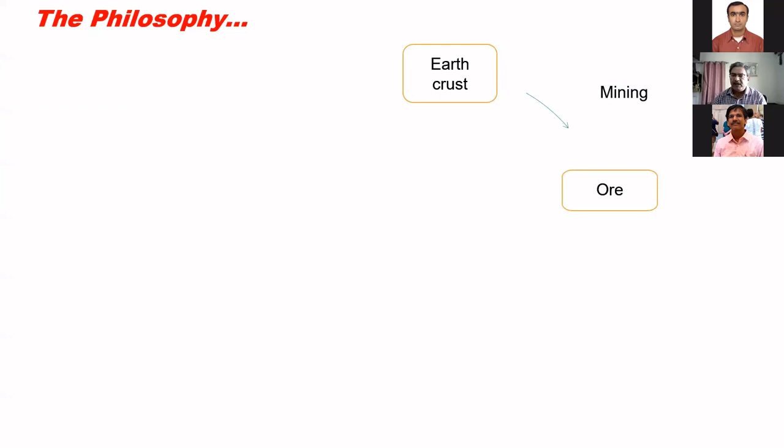Now, moving on to the philosophy. The philosophy is very simple. Earth crust is being exploited in the form of mining activities. We dig out ores, we take them to the processing units, mineral is extracted, everybody is happy, industries are making money, nobody bothers about what is going to happen further on.

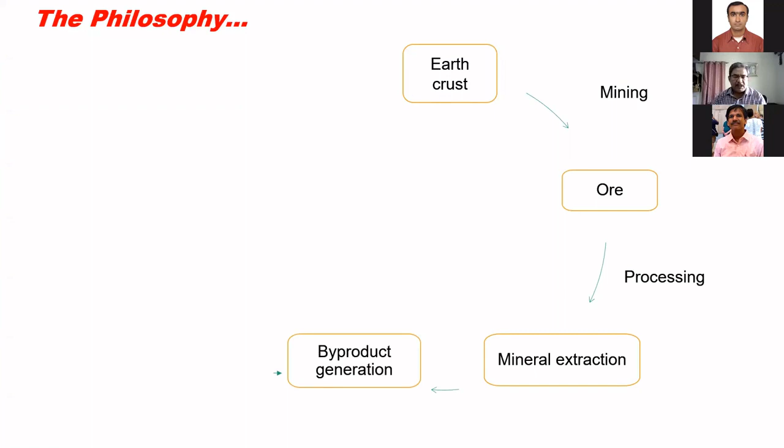This is where the byproducts are generated, and these byproducts are transported to different locations. We call them dumping yards, stacks. These could be lagoons where we are storing them, or disposal ponds, and so on. People have started realizing that handling, disposal, and storage of all these types of industrial byproducts is becoming a major task, a major problem. So there's a big question mark where a lot of environmental geotechnology related issues have to be discussed, and I'm sure previous speakers have already talked about this.

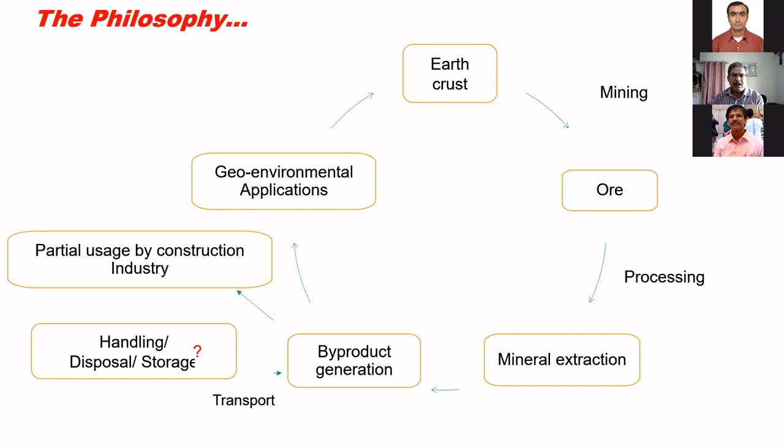Partial uses by the construction industry has already been demonstrated, and it has been very successful. Unfortunately, geo-environmental applications have not been done much with this waste, and the sustainable development part was also missing.

The major thing which is in my mind is how to utilize these industrial byproducts in bulk. India produces hundreds of millions of tons of each of these wastes per year. The question is, unless we clean this up, industries cannot go ahead with their task. Industry ultimately wants to generate the product, not the byproduct. And even if byproducts are being generated, the better picture would be to utilize them so that we can create more space for tomorrow's dumping. So the theme is how to utilize all these industrial byproducts in bulk, millions of tons at a time.

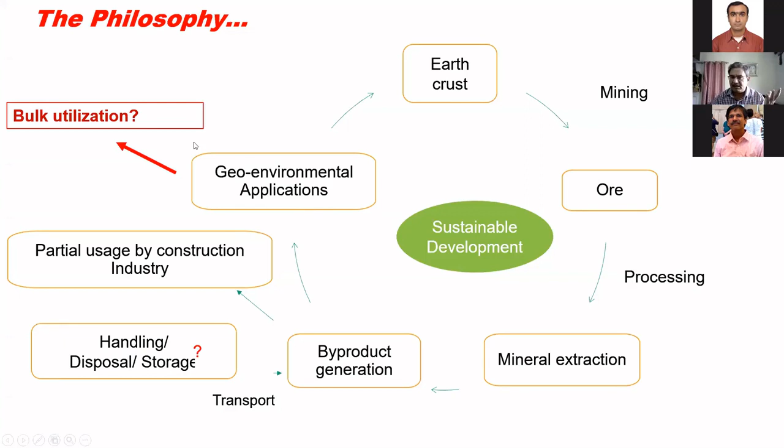The potential industrial byproducts which I have selected are the bauxite residues. It so happened that most of my funding agencies or sponsors happen to be the guys who are dealing with red mud in the country.

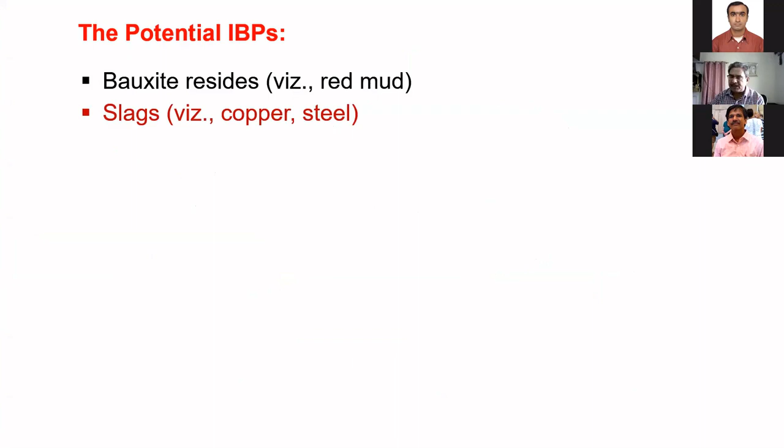The slags, copper and steel both. Ash from combustion, different types of ashes which are coming out of the combustion. Biomine waste - Krishna Reddy has done a lot of work in this area.

And the issue is that when we talk about municipal solid waste, there are big mountains of landfills which have been created in the middle of the cities. People are clueless what to do with this. And this is where my idea is that biomining should be done to clean up the land, and we can utilize it for a better purpose.

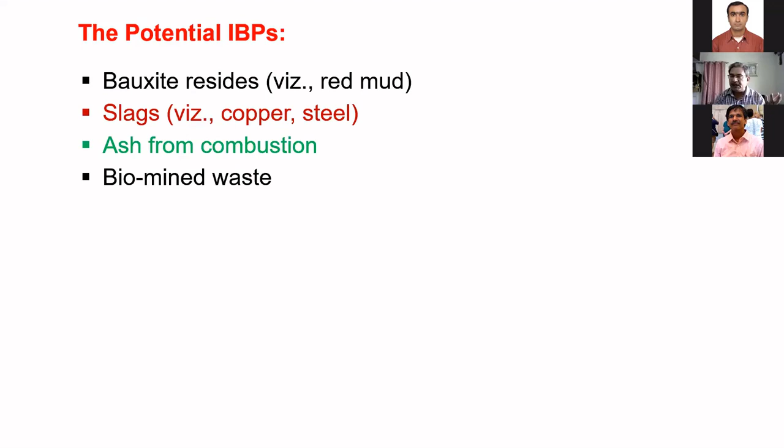But the questions are several. Once you start biomining, where and how you are going to dispose of the materials which are coming out of the biomining process - that's a big challenge. And of course, the mine tailings and overburden from mining is also a part of this mission.

And that is where I said it so happens that the theme of this short-term course happens to be a subset of the mission IBPs.

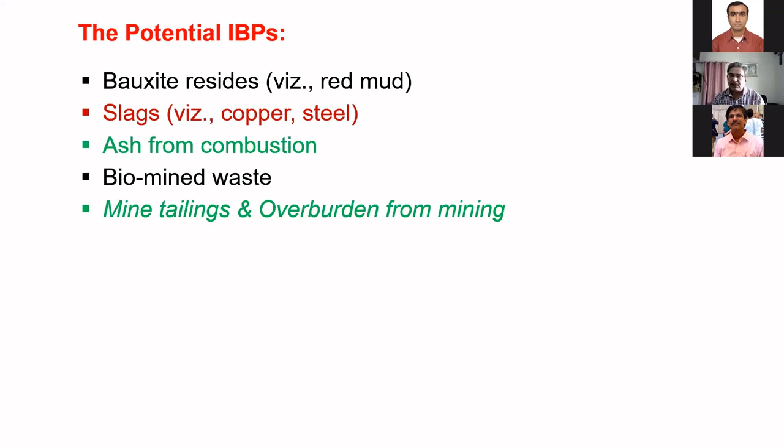These are the priority areas, apart from which I am also dealing with construction and demolition waste, dredge sediments, because I'm located in a city like Bombay, where several ports are there, private and government operated. The biggest challenge is what to do with the dredge sediments - where to store them, how to reuse them, how to do engineering out of them, and so on.

And of course, coal washery residues. I was lucky enough to be a part of a big project in central India, where we utilized the coal washery residues for creating a railway embankment and the sidings.

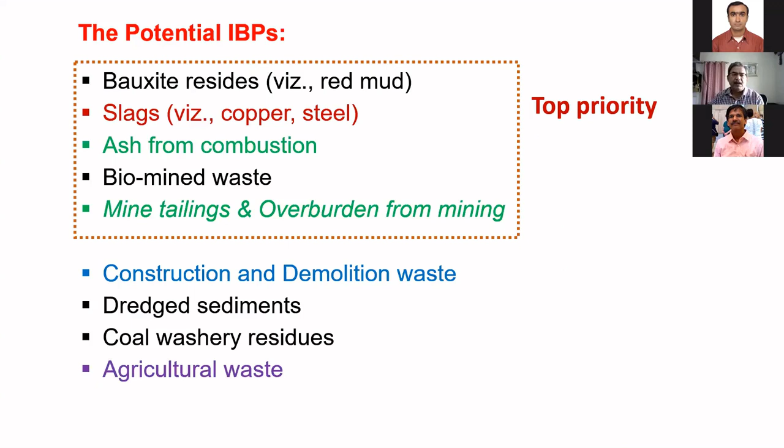We are also talking about agricultural waste, which is very contemporary in the context of India being an agrarian society. So bio-mined waste and agricultural waste is also part of the mission IBPs. Out of so many modules, which I call them, the first 5 are the top priority because the volumes are really tremendous, and industry is very happy to collaborate with academia to sort out this issue.

The motivation comes from the fact that industrial establishments in India and all over the world contribute to the growth of economy through good output, something like the main product. Look at a thermal power plant - they produce electricity, good output. But at the same time, they struggle to deal with the bad output - fly ash. Similarly, steel manufacturing industries produce steel, very fine, but the bad output is slag. These coupled phenomena are happening everywhere, and this is the genesis of the motivation for taking up this project.

I wish that IBPs should become part of the mission Waste to Wealth and Welfare - I call this WWW - through recovery, recycling, and reuse. In fact, I've suggested to the Government of India to create a different ministry known as WWW, Waste to Wealth and Welfare. Welfare is becoming very important, and I'll show how this philosophy can be linked with welfare of society and individuals. That is the mission IBPs - achieving this through recovery, recycling, and reuse into a well-defined policy.

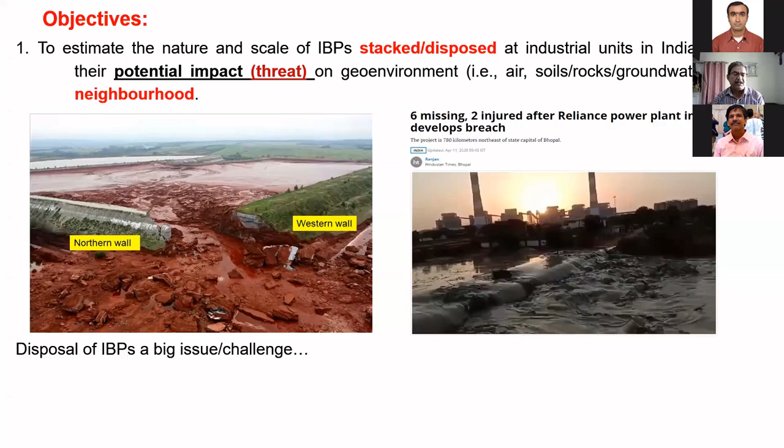In my own country in India, this happened a few months back - there was a breach of the dike from the ash pond. So these pictures challenge us: what should be our role in nation building? Disposal of industrial byproducts is becoming a big issue and challenge.

Everybody is realizing that their disposal facilities have lived their life. They are aged and have already exhausted their capacity for taking fresh industrial byproducts, and they are prone to failures. Audits have never been done regarding the stability of these systems, their age, or how the weathering process might have changed the properties of the geomaterials used to create them maybe 60 or 70 years back.

There is no availability of land. You talk to industries, the biggest question is they can't expand the disposal facilities - like in cities, you can't expand the MSW disposal facilities, landfills. It's becoming a very hapless situation, and whether operations should be continued or permanently closed is being thought of. Industries are thinking about whether to continue operations or close them completely. Now, closing operations is not going to be a solution for developing nations particularly.

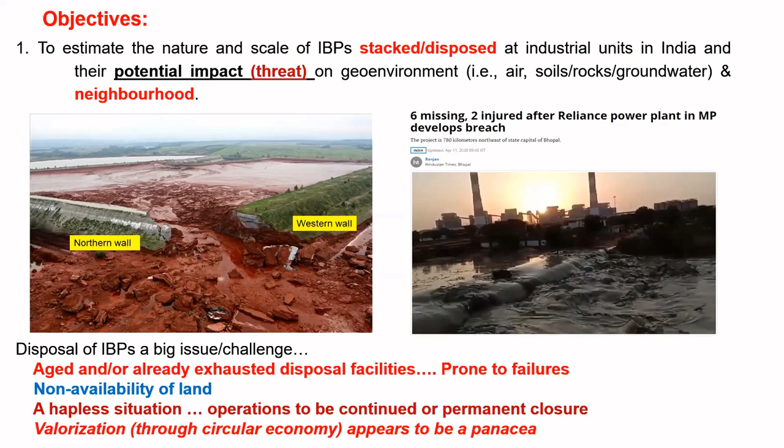So this is where the valorization concept fits in extremely well, clubbing it with circular economy. I was talking about the WWW mission - so where is the welfare? The welfare comes from the circular economy attached to the valorization of industrial byproducts, which is mostly an industrial process adopted by geotechnical engineers, civil engineers, technologists, followed by creating a circular economy out of it. Once this is done, this will be a very win-win situation for everybody.

The second thing is we would like to assess the status of existing scientifically proven innovative emerging technologies for valorization of industrial byproducts. This is where I said I want to audit who has been successful in valorizing the industrial byproducts, both at field level and laboratory level. So these are success stories. Out of these success stories, apart from writing papers, how many codes have been developed?

Because this is what the administrators ask you - the agencies who are going to implement it ask you, is there any codal provision for utilizing this material? And we got a very sorry figure over there, because research has not really percolated into creation of codes, the code of practices, and policies.

So valorization of IBPs for different applications, sustainable ecological infrastructure development - this is the main theme, being a civil engineer and a geotechnical engineer. We want to do this.

Monitoring the impact of industrial byproducts on the ecosystem, both in their native and recreated state. Suppose if you utilize this industrial byproduct and create something somewhere, how it is going to impact the geo-environment, both in the form of the stacks which are present over there, and how these recreated systems would contribute to contamination.

Creating policy guidelines to identify industrial byproducts as a man-made resource. I'm sure my idea is that all these industrial byproducts can be converted into man-made resources, either through in situ or ex situ neutralization, or man-made soils. Some of my research scholars are working on this concept of converting IBPs into man-made soils, and there has been some success. I will share some results with you.

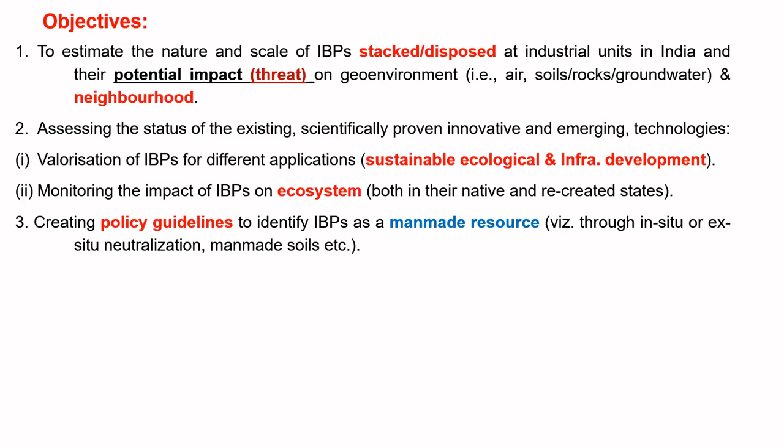The biggest issue is transportation of the industrial byproducts. If I want to transport industrial byproducts, there are no policies. People say it's a hazardous toxic waste, you can't even touch it, you can't even transport it, you can't even courier it for testing the samples. These type of regulations exist, unfortunately. So creating policies for transportation of IBPs in bulk from the place of disposal stack to the place of utilization - if this happens, 90% of the task is done, because I know the technology is there and we can use the material without any problem.

And of course, I wish to create a task force in the mission mode for industrial byproducts, and formulation of relevant codes, manuals, standards, and guidelines.

Another challenge would be transition from policy to practice, which is very challenging, and exploring the possibility related to the circular economy revolving around industrial byproducts, particularly after the COVID-19 situation.

Background work - several meetings have been done. I'm sure Sharath was also a part of this, and some of the audience were also part of these activities. All these are available on the website. When you visit my Mission IBP's link on my webpage, you can find everything over there.

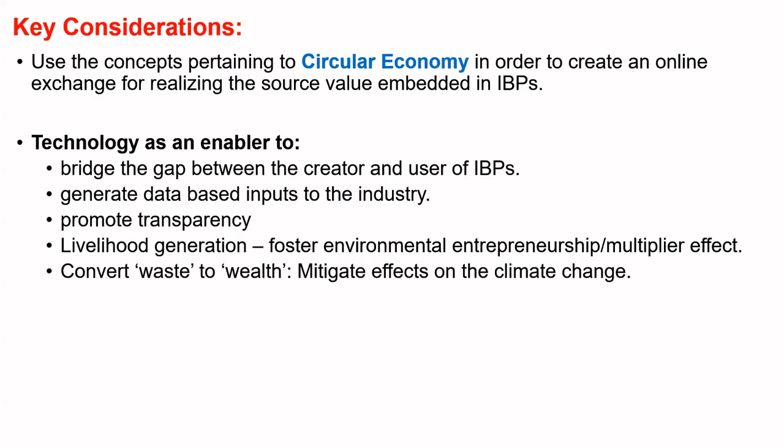We want to generate a database for industry as an input, promote transparency in the whole process. We want to create livelihood generation of environmental entrepreneurship multiplier effects, I call them, and convert waste to wealth and mitigate effects of climate change.

This is also getting linked with CSR, corporate social responsibility. Now this is known as scientific social responsibility, of which I was a part - I was a member of that committee of the Government of India. So there's something known as scientific social responsibility, which is now looking at these type of activities.

I'm sure people who are interested in becoming entrepreneurs - I call them environmental entrepreneurs - because they are dealing with these type of thoughts and ideas, can become a part of this. And collaboration between academia and industry for contributing towards more sustainable development initiatives.

What is the way forward? The way forward is that data from individuals, researchers, industry is very, very crucial. Please share this data with us in the form of research which you have conducted so far, technology demonstration which you have done so far. This is what is going to help in creating future strategies.

This data analysis is going to provide direction regarding possible usages and identification of matchmaking of industrial byproducts - what should be added to one IBP to create a value-added material. This is what I call the matchmaking of IBPs. Sometimes I also call this the horoscope reading. Some of you who understand, there's a big science behind matching the horoscopes of the bride and groom before they get married. So it's something of that sort which the thought process is based on.

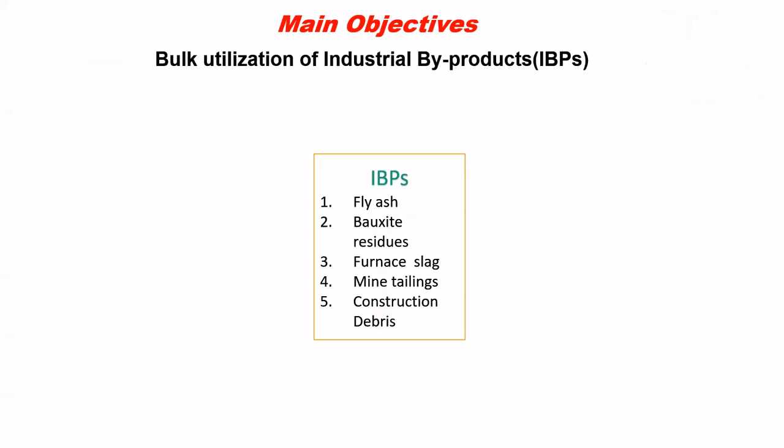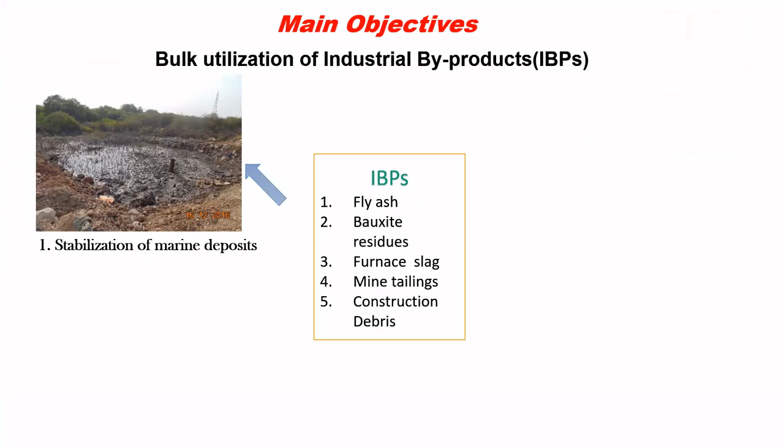We have used fly ash, bauxite residues, furnace slags, mine tailings, construction debris for stabilization of marine deposits. This was a project executed very close to Bombay City for creation of a new port, where we stabilized the marine clay using different industrial byproducts.

These are man-made soil examples, where the red mud lying in the pond can be utilized as a man-made soil - I am working on this right now. This technology demonstration has already been done at the Hindalco site and at Utkal, where we have created roads and pavements for their traffic movement.

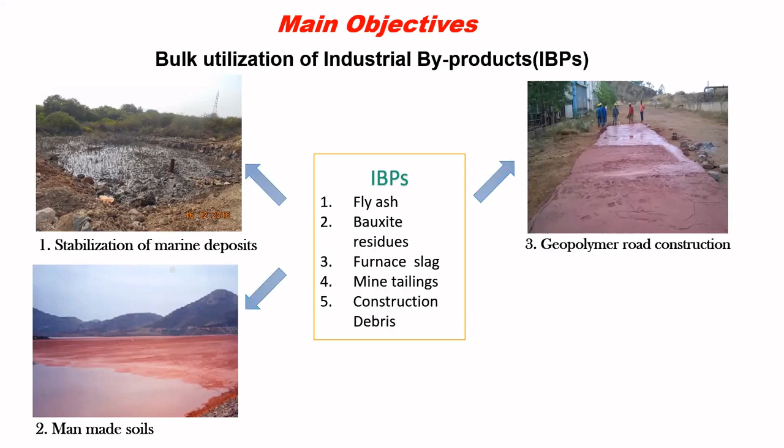A recent project we have taken up is mine backfilling. We have got sanction from the Government of India, and they have allowed us to go ahead with our mine backfilling plans, where I'm using bauxite residues from where they came, that is the mines.

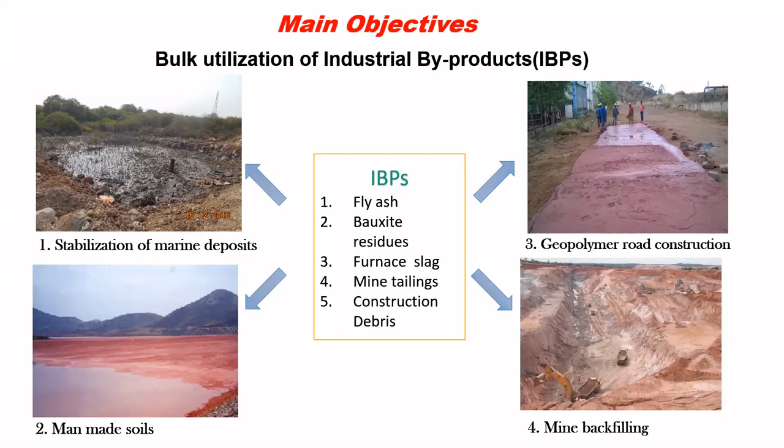These are the success stories so far. We have good publications to show the technology demonstration, and it's quite heartening that my students are doing so good in this part of the research. And we have patents also related to industrial byproducts for stabilization of marine deposits with industrial byproducts.

And we have created this patent for road upgrades, and another device which has been created for simulating the neutralization of bauxite residues by gas purging. This is under patenting. The patent has been filed and it's yet to be granted.

I would like to draw your attention towards the recent advertisement from the International Society of Environmental Geotechnology. You must have noticed there is a center for geotechnical, geoenvironmental research and innovation, which I call SEGRIN, that has been announced. You can become a part of this by clicking on this link and sharing your ideas on how you would like to become a partner for SEGRIN.